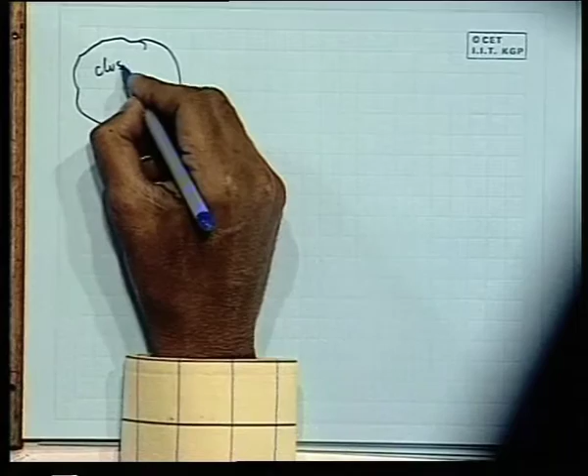and if it goes from state 1, equilibrium state, to another equilibrium state 2, state 1 to state 2, during which it interacts with the surrounding in the form of heat received.

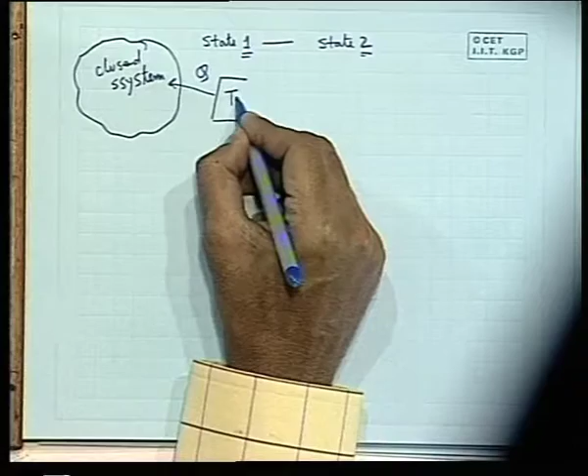Let us consider the heat is received from a thermal reservoir at temperature Th, whereas the environment temperature is T0, which is a fixed undisturbed surrounding. This environment word is used in thermodynamics, distinguishing it from surrounding.

Surrounding is that part of the environment with which a system interacts. This means that in case of two interacting systems, one is the surrounding of the other, but environment is the rest part of the surrounding which is undisturbed in the process. You understand? So that is the environment which is at a temperature T0, based on which we calculate the exergy or availability.

And let us consider the system develops some work W, which we already considered in the last class. And if it goes from state 1 to state 2, and if we designate all the properties like pressure, volume, then internal energy U1 - we consider E if it contains some movable particles, that means kinetic energy, also potential energy with respect to a reference datum.

So we consider as a whole the internal energy, not only the intermolecular energy, then T1, S1, and correspondingly state 2 is V2, E2, T2, S2 and so on - all the properties at state 1 and state 2.

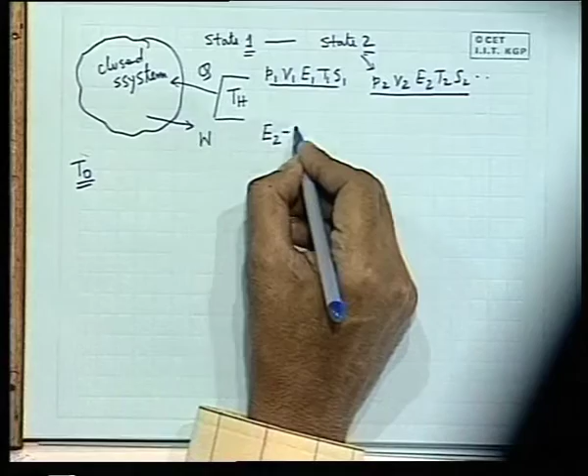Again recapitulating the fact that conservation of energy tells that the change in energy stored within the system, that internal energy, is equal to the total energy received by the system.

Here we do not care where the Q is coming from, from which temperature - we are only concerned with the amount of Q which is coming. So this is purely the energy balance, our classical statement of conservation of energy, or the first law.

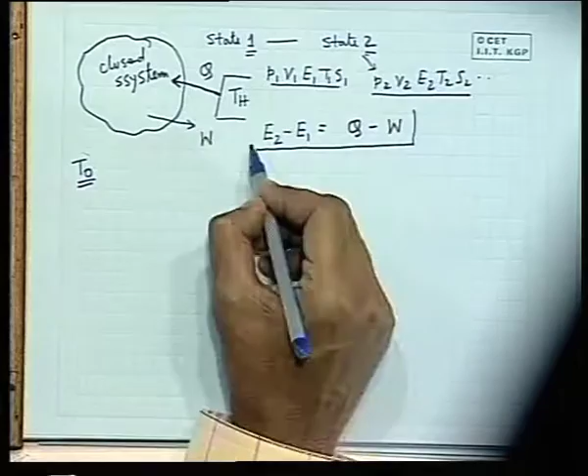That means the change in internal energy equals the net amount of energy received by the system in form of heat and work. That means the final energy, E2 of this system, will be denoted accordingly. It will increase or decrease depending upon whether there is a net energy inflow or outflow from the system.

All right, but now mass is constant - that is the definition of the closed system. Now, what about the availability?

If you do the same availability balance, we know that A2 is the availability of the system at state 2. If availability could have been conserved, neither destroyed nor created, the way energy quantities do, we could have written that the change in availability equals the availability added to the system - that means the availability associated with this heat from a thermal reservoir TH with respect to an exergy environment temperature or reference environment temperature, Q times 1 minus T0 by TH.

This means the availability which has come into the system with Q, minus the availability which has gone out, minus W minus P0 into V2 minus V1, the work lost in compressing the surrounding — this is the net availability coming out, and this is the net availability coming in. So this could have been like this, but we have seen that this change is not equal to this.

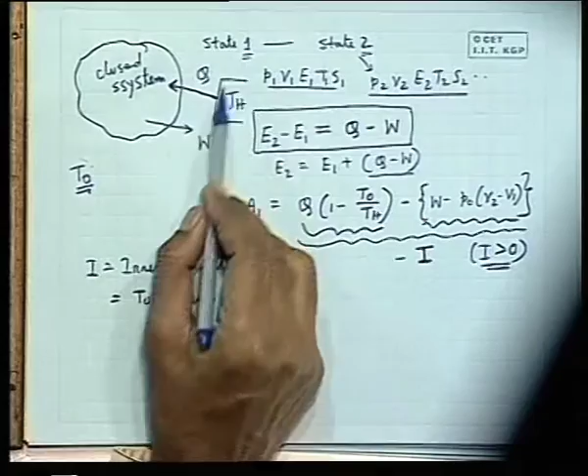Rather, this is minus I, where I is greater than 0, which is the irreversibility. I is called irreversibility, and is defined as T0 into delta S universe, or T0 into sigma entropy generation. This is the delta S, the entropy change of the universe, or entropy generation in this process, by which the system goes from state 1 to state 2 by interacting with the surrounding in the form of heat and work.

So therefore, we see the change in availability is not equal to the net availability transfer. That means the availability A2 should be A1 plus — let us consider this quantity as AT, availability transferred in this entire process — plus AT minus I.

So this is the basic equation for availability transfer. Here one thing you have to understand: just like entropy, we always see that entropy of the universe increases, but not that entropy of a system will increase — it may decrease depending upon the condition.

Similarly, the total availability is reduced or destructed, but the system availability may increase or may decrease. Now here, A2 may decrease or A2 may increase depending upon the relative magnitude of AT and I, where AT is the total availability transfer.

Now, in case when the availability transfer is positive, this quantity is positive and it is more than the availability destroyed, then obviously A2 will increase. A2 may increase or decrease depending upon the relative magnitude of this quantity.

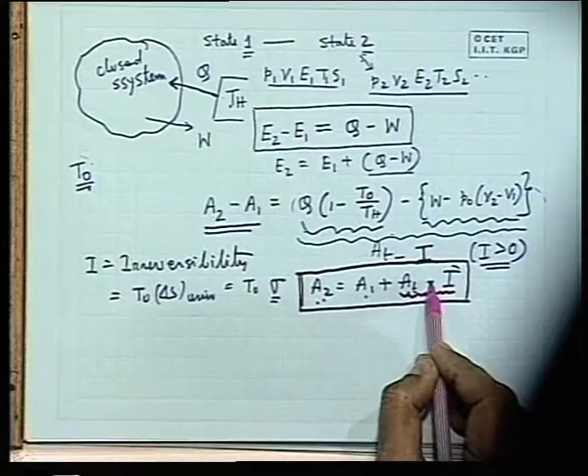When there is a net inflow of availability to the system, transferred in, then definitely A2 will increase, provided the destruction is less, but its increase will not be equal to A1 plus AT, but A1 plus AT minus some quantity — that means the availability is destroyed in the process.

Whether the system gains in availability or reduces or decreases in availability, this change in availability will not be equal to the total availability transferred, but with a quantity minus I, which is the availability destroyed.

This we discussed in the last class. How did we prove it? We first proved what is the availability function.

At any state, this availability function, or availability, is defined as E plus P0V minus T0S, where S, V, E are properties of the system — that is, internal energy, volume and entropy — and P0, T0 are the temperature of the surrounding. This T0, and also P0, is the pressure of the surrounding.

In case of a stationary system, this E quantity will be substituted by U, that is internal energy. Stationary system means where we consider the kinetic energy to be 0, and also if you consider the changes in potential energy to be negligible, then E can be replaced by U. So this is known as the availability function, or simply availability, referred to a single state.

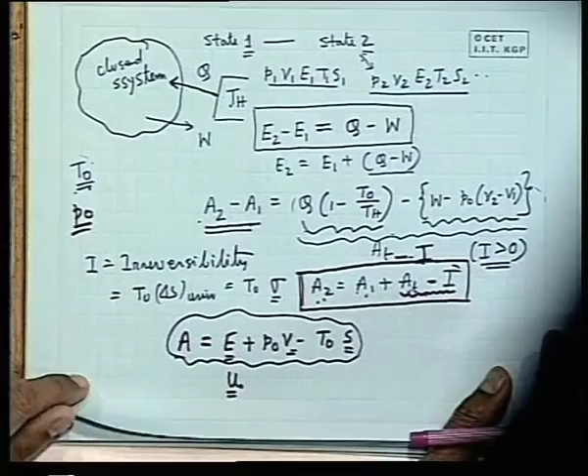First we proved this from the concept of availability by its definition, then we proved that availability is destroyed in a closed system. Now the same thing we will discuss for an open system, but before that, as you have pointed out rightly, side by side we should write the equation for entropy.

Now you see, this is the equation for energy balance, this is the equation for availability balance, including this I — this is the availability balance, where AT is this minus this, the net availability transferred in. So why not side by side we write the entropy equation.

So that is why this question, which one of you asked me — sir, entropy flow and all these things — will be sorted out. Now in the entropy equation, we can write S2 minus S1, that is the change of entropy, plus this minus — rather, this will be minus Q by TH.

Delta S universe is equal to what? Or whatever you can write, sigma or sigma. So this you see is the change of entropy of the system. This you can...

considered as, in this side, Q by Th plus sigma. So you see that the change of entropy of this system does not equal Q by Th. This Q by Th is actually, if you follow classical reversible thermodynamics terminology, delta S system plus delta S surrounding that I told earlier, is delta S universe, which is nothing but the entropy generation. So this is delta S surrounding.

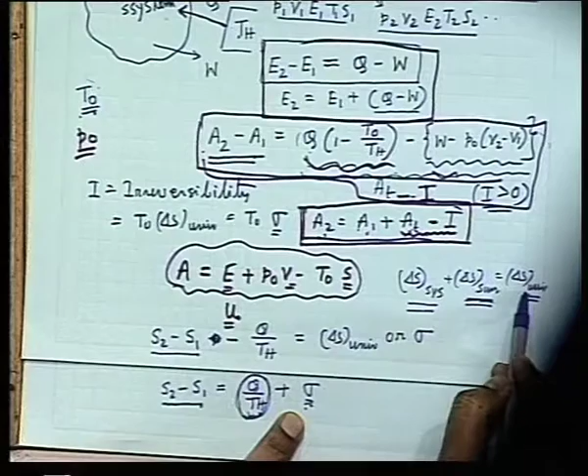You see that the increase in entropy of the system is more than the entropy which is received, if you consider this in terms of the entropy received plus the entropy production or entropy generation, which is nothing but delta S universe. Earlier also I have shown these three equations simultaneously, the same form, where we can recognize one is delta S system, another is delta S surrounding or entropy flow to the system, that becomes equal to sigma, which is equal to the total change in the entropy of the universe, or the entropy generation.

This is the closed system entropy balance. For an open system, things will change a little because of the mass flux across the system boundary. I think this is clear.

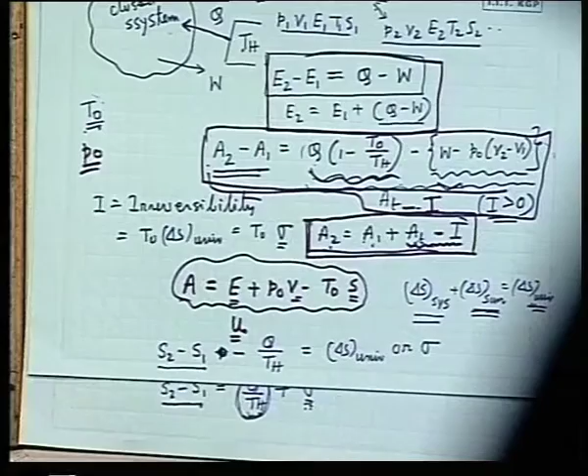The energy balance, the availability balance, and vis-a-vis the entropy balance of a closed system are given by this equation, this equation, this equation. And you see, whereas the energy quantity remains constant, the availability and the entropy quantity are not constant. Availability is reduced and entropy is increased, okay?

Now you come to the same thing for an open system. Let us consider an open system or a control volume. Open system or a control volume. Let us consider an inflow, one single stream of inflow and outflow.

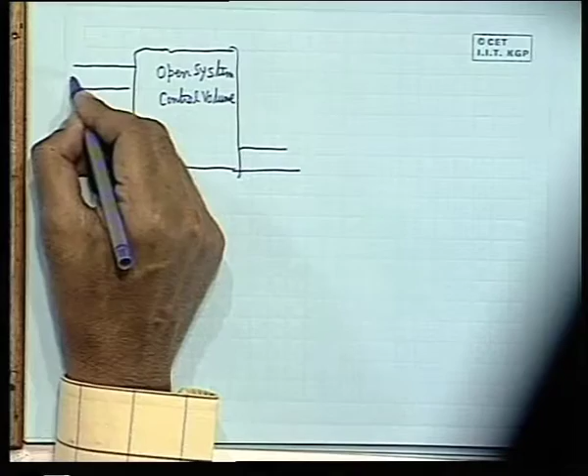So this is, let us consider this as inflow, and let us consider this as outflow. Now, the only difference is that there is a continuous inflow and continuous outflow, and since an open system always operates in this way, there is a continuous inflow and continuous outflow.

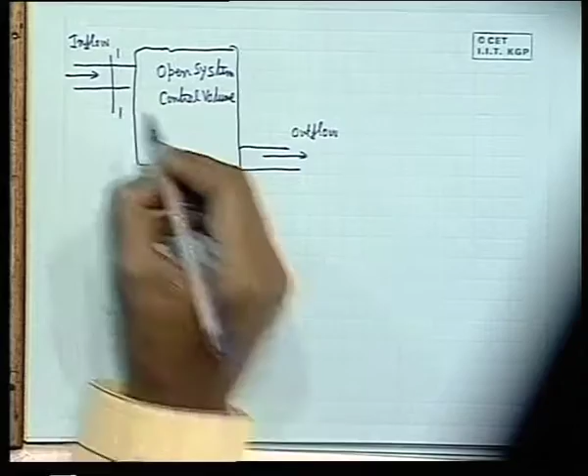So that is why an open system is a continuous system. So things are always analyzed in terms of the rate process. Therefore, I first designate section 1 and section 2, the way I designated state 1, state 2 for a closed system, for the open system 1, 2, and I designate everything in terms of the rate, that means dot. Dot means the derivative with respect to time. M1 dot is the rate at which mass enters the open system.

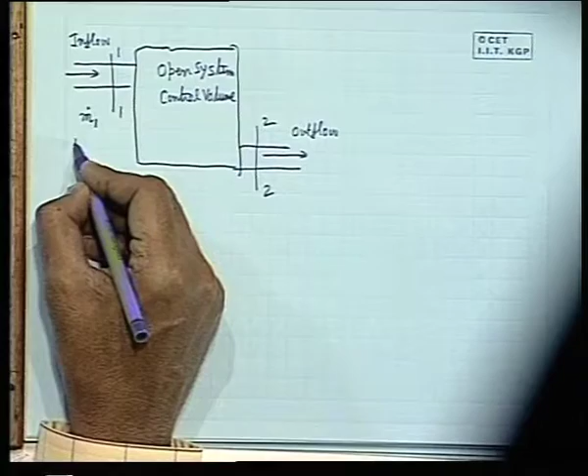Similarly, here the specific values of these properties are required: internal energy, as you have already seen earlier, plus P1 V1 plus V1 square by 2 plus GZ1. What is GZ1? Z1 is the elevation compared to, or measured from, any reference datum. Then this quantity represents the specific energy, total energy per unit mass associated with the flowing stream. It is a repetition that this is the internal energy, this is the flow work, this is the kinetic energy, this is the potential energy.

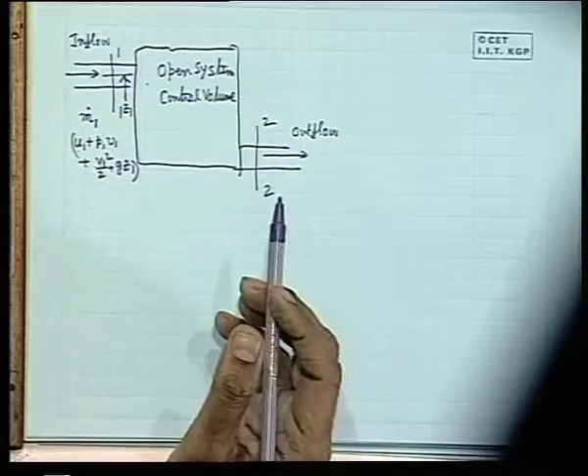That means when this flux is introduced into the open system, along with this flux, this amount of specific energy, that is flow energy, sometimes we call it flow energy, is being introduced into the open system. Similar is the case here. If we write that m2 dot is the mass flow rate, then we can write similarly this quantity: u2 plus p2 v2 plus v2 square by 2 plus gz2.

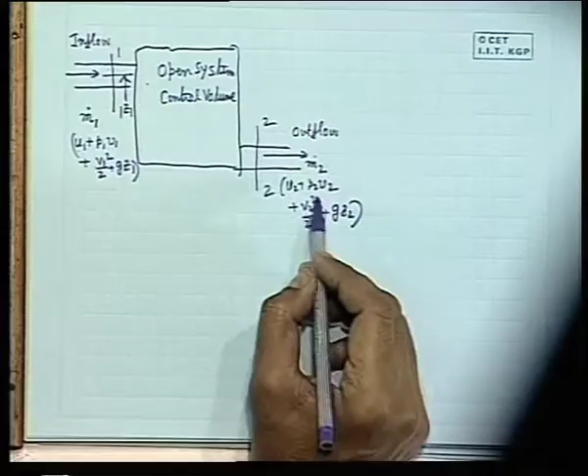Can you see that, p2 v2? Okay, very good. I will write it in a little bigger font. This is the specific energy coming in.

So first is the mass balance. To do that, we consider in general that mCV is the control volume mass and ECV is the control volume energy, recapitulation of the earlier thing. So mass balance, the conservation of mass in an open system: the way energy is conserved, mass is neither created nor destroyed. So m1 dot minus m2 dot equals dmCV/dt, that is the change of mass. That is the first mass conservation.

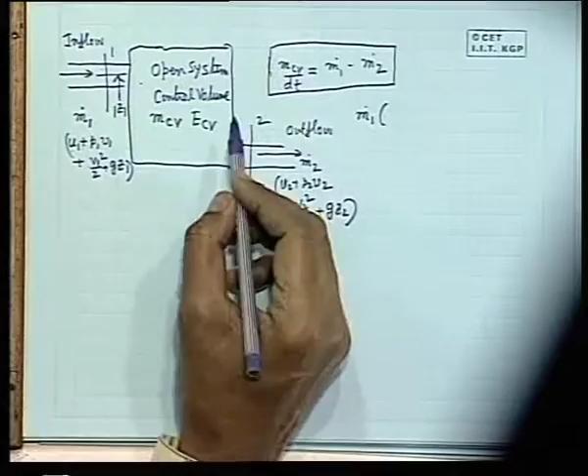Then what is energy conservation? If we write here, we can write m1 dot into that, that is the energy. Apart from that, we can consider the open system also interacts energy in the form of heat and work.

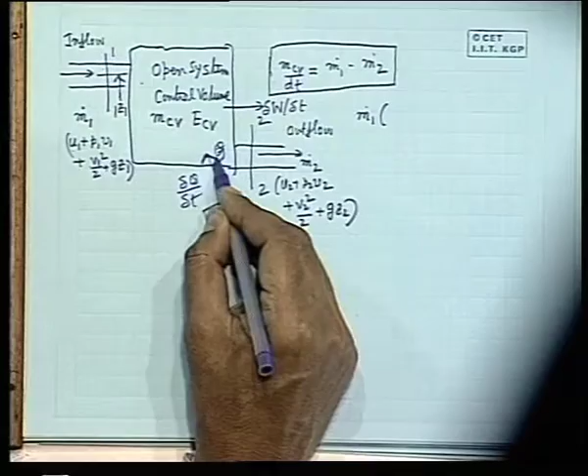Let some heat be coming to the open system, Q, from a reservoir TH, and let this system develop some work W. Here also we consider in terms of the rate, del Q del T, not Q, and we consider del W del T. This means this is the rate at which heat is being added, and this is the rate at which work is being extracted from an open system, which is usually the shaft work.

Now we make an energy balance. We can write that the change in energy, dECV/dt of the control volume, is nothing but the net energy coming into the control volume. Energy is coming in two ways: one due to mass, and another due to heat and work interaction.

So what is the net coming in? One is m1 dot times u1 plus p1v1 plus V1 squared by 2 plus gz1, plus del Q del T, it is coming in. And what is going out is minus m2 dot, u2 plus p2v2 plus V2 squared by 2 plus gz2, minus del W del T. So this is as simple as that.

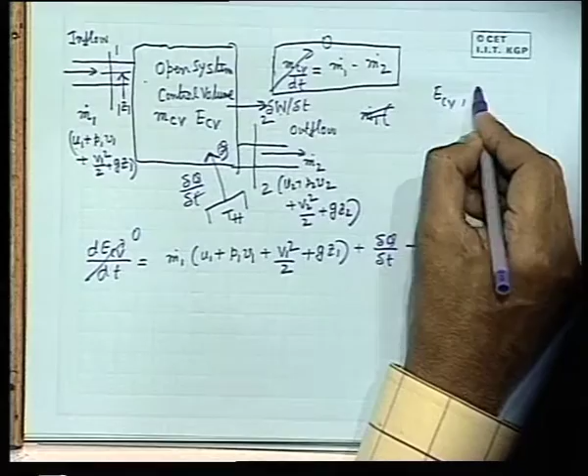Now in case of steady state, we consider this is 0 and this is 0, which is most important. In a control volume or open system, the influx and efflux may not be the same, both in terms of mass and energy, so the property within this open system may change. But in a steady state operation, the state variables at inflow and outflow may change because of these W and Q interactions, but the total energy coming in and total energy going out, along with delta W and del Q, make the thing steady, meaning the properties within the system do not change with time, which means both ECV and mCV remain invariant with time.

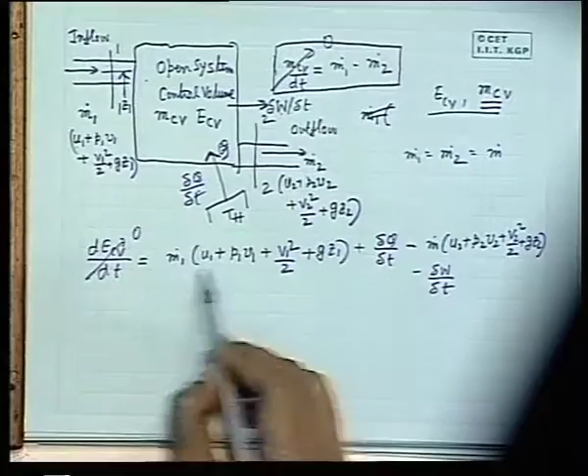So in that case what happens? m1 dot is equal to m2 dot, meaning the mass flow rate at inlet and outlet are the same. Let this be m dot. So if this is 0 and m1 dot equals m2 dot, then conventionally we write this equation under steady flow condition in terms of the mass balance -- you understand, not mass balance, in terms of per unit mass.

That means we can write U1 plus P1V1 plus V1 squared by 2 plus gz1, minus U2 plus P2V2 plus V2 squared by 2 plus gz2. We can take this side: del W del T minus... this gives a clear picture that there is a balance between the energy transfer because of mass flow and because of heat-work interaction. So this we studied earlier. This is for the steady state. Any problem? Is this clear?

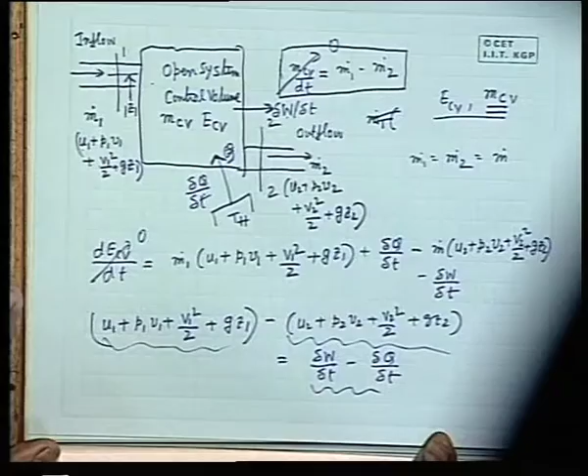Del m, sorry, per unit mass, del m. Clear? Because this is the recapitulation of the earlier thing.

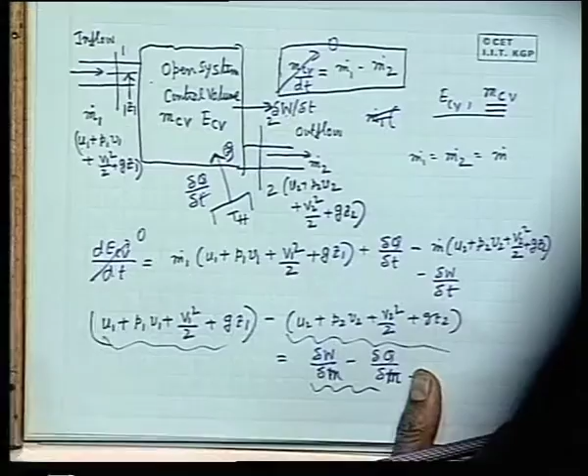Now consider if along with this we go for an availability balance, what will be the picture. Okay, let us draw the same diagram again for our same diagram. Let this be the control volume.

Here we will consider only the availability. In a similar way, m1 dot, m2 dot, from section 1 to section 2.

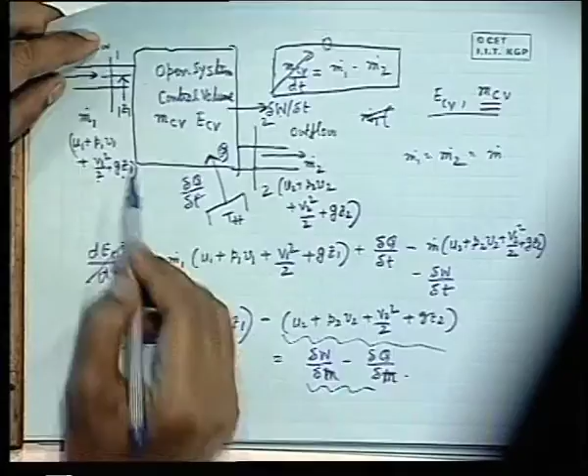Now, we know that with m1 dot there is an energy coming in, that is m1 into u1 plus p1 v1 plus v1 square by 2 plus gz1. So, with m1 mass flux there is an energy flux.

Similarly, with m2 mass flux there is an energy flux. In a similar way, if we consider there is an availability flux coming into the control volume because of this flowing stream of fluid of the working system, there is an availability whose specific value we denote as AF1. This is because of the flow, and is known as flow availability. Let us define the flow availability at the other section as AF2.

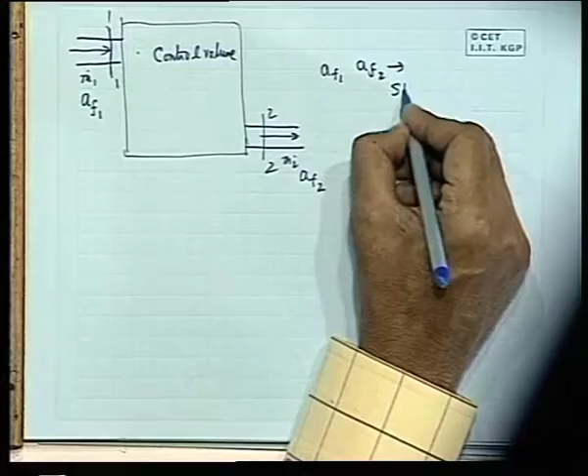Because the space is very small, otherwise I could have shown everything in comparison, energy flux versus availability flux, that could have been even better. That means, in case of energy, there was a specific energy associated with the flow, that is H, H1 depending upon the state, that is U1 plus P1V1, plus V1 square by 2 plus gz1.

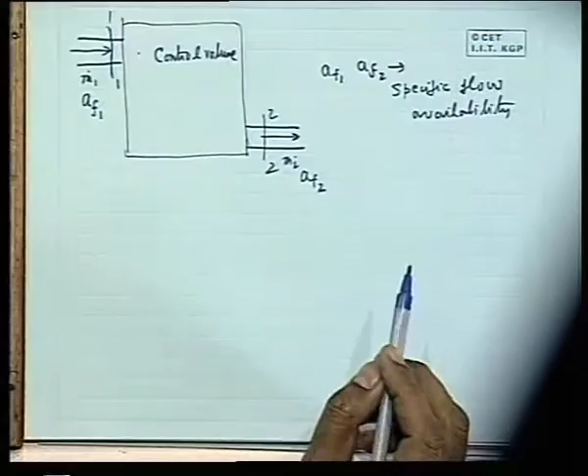Similarly, if we consider there is a specific flow availability, the availability per unit mass along with the flowing stream, then in the similar way as we did for energy, at a certain rate the availability is coming into the control volume, and at a certain rate availability is going out of the control volume.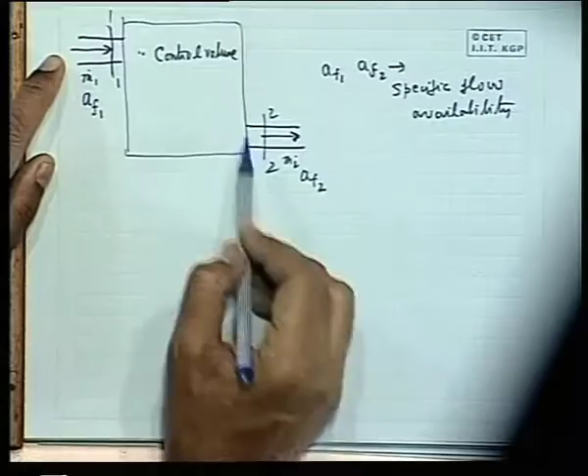This is the most important concept: the difference with respect to a closed system is that mass flux exists across this boundary. When mass comes in, along with it, it brings energy to the control volume, whose value is m1 dot into the specific flow energy, which is the sum of enthalpy plus kinetic and potential energy. Similarly, it brings into the control volume some availability.

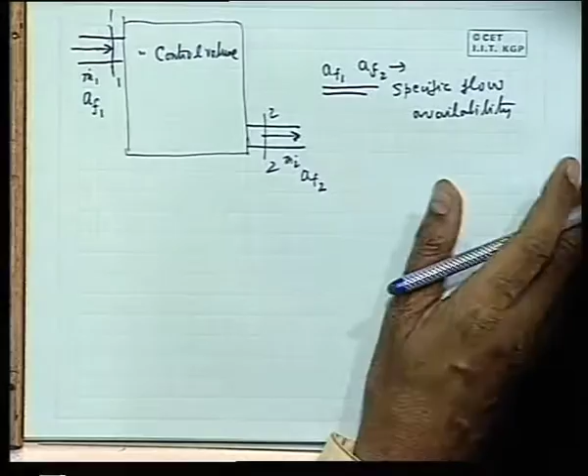To account for that, we define availability per unit mass with the flow stream at inlet and outlet, defined as specific flow availability. For now, we take this for our understanding, then later I will find its expression.

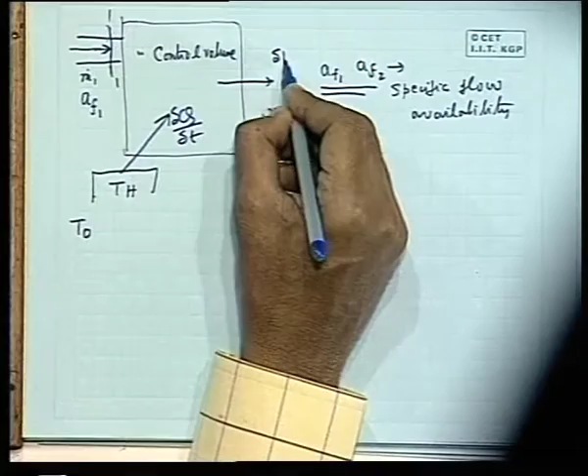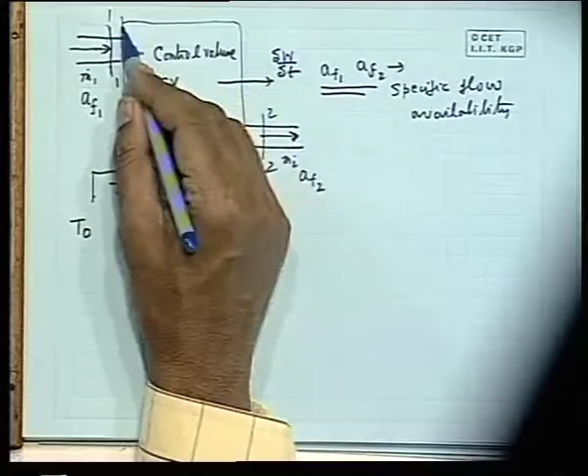In a similar way, if we consider that Q is given here from a temperature reservoir TH, whereas the environment is at T0, we consider del Q del T and del W del T, the rate at which work is coming out. Similar to the case of energy and mass, if ACV is the total availability within the control volume at any instant, then by the method of induction we can appreciate that dACV/dt is never equal to the total availability balance.

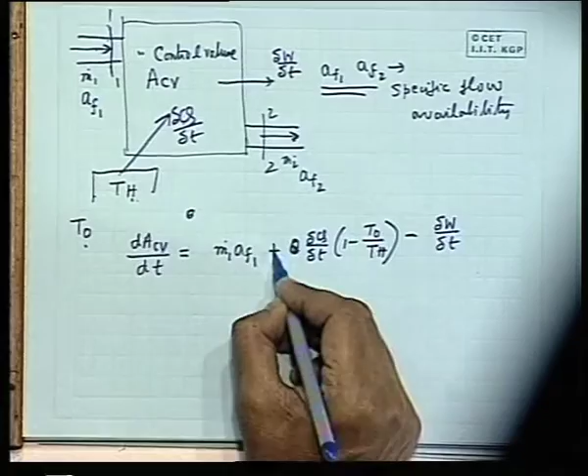So this part will be there. In case of energy, it was only del Q by T minus del W del T, because it is shaft work, no displacement work, since the control volume is fixed in its volume in space. So minus delta, this is the net energy transferred. So this is the net availability transferred to the control volume.

If we do that by the process of induction, as we have done so far, we find this equality will not hold good; something will be destroyed. That means the change in availability with time will not equal the net rate of availability coming into the control volume. There will always be a term I, the irreversibility, which equals T0 into delta S universe, or T0 sigma of the system.

I dot is T0 into delta S dot, the rate at which entropy is being generated, or the rate of change of entropy of the universe. Thank you very much, it is I dot, very good.

By our common sense and method of induction we can tell that in a steady state this will be 0, and accordingly this minus this I dot, the net rate of availability influx minus I dot, equals 0. This is the precise concept parallel to the closed system's availability balance, but now for a control volume.

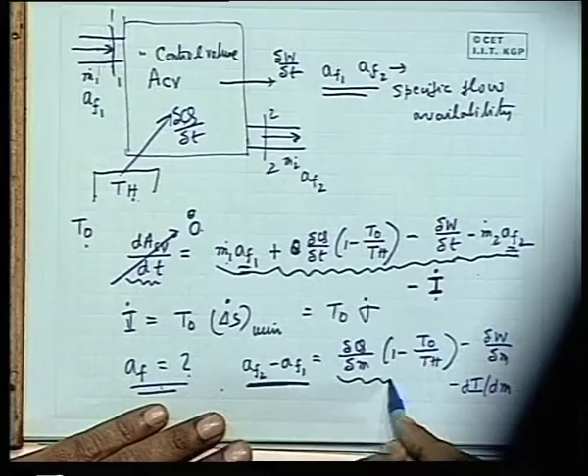So in a steady state, one can write this equation as AF2 minus AF1 equals del Q del M. into 1 minus T0 by TH minus del W del M minus I dot, that is dI dm. So in steady state it is again clear that this change in flow availability is not just the net availability transferred into the system, but minus some quantity which is the irreversibility per unit mass, similar to what we saw for a closed system.

This equation is all right, now we need to understand what is this flow availability. We wrote it following the sequence from the closed system analysis. So then we have to find the expression for flow availability, the concept of which we've taken as: imagine a control volume with an inflow.

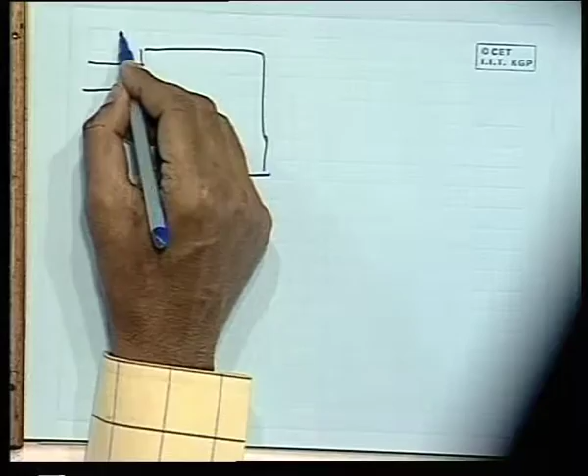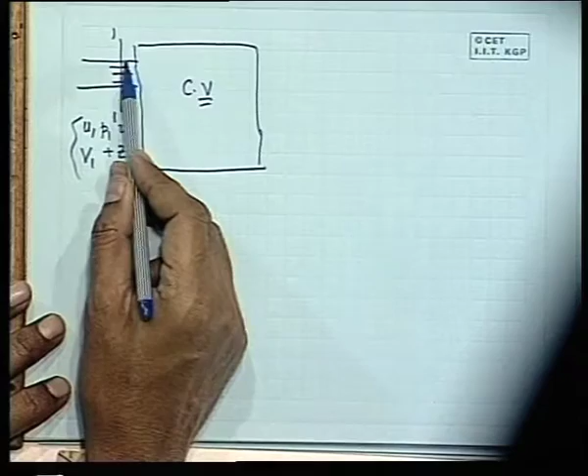The flow availability is defined this way: if there is a stream of fluid coming into a control volume whose states are specified, for example U1, P1, V1 the velocity, Z1 from some datum the potential energy per unit mass, whose specific values are fixed, then the flow availability of this mass of fluid flowing in is defined as the maximum work that can be extracted from this stream by an operation through a control volume or open system.

By which this stream comes into equilibrium with the fixed environment, similar to how we defined availability for a closed system: the closed system is at a state different from the fixed environment, so there exists an opportunity to develop work, and the maximum work obtainable is only possible in a reversible process when the system reaches the dead state.

Here also, when the flow of fluid stream comes to a dead state, what is that dead state? It's when its properties equal the ambient properties and there is no kinetic energy. Because if a system is at the same pressure and temperature as the surroundings but has velocity, since the surroundings is a fixed reference environment at rest, its velocity must also be 0. Similarly, considering gravitational potential energy, this state must coincide with the reference datum of gravitational potential energy from which it is measured, not the absolute scale at the center of the earth, but somewhere from where we measure the gravitational potential energy.

But fortunately, in the analysis of thermodynamic systems or processes, the change in gravitational energies, for all practical cases, is quite negligible as compared to the changes of other quantities. So we are not much bothered about the gravitational potential energy and where is the datum and all these things. But kinetic energy has to be 0, otherwise a flowing stream cannot come to a dead state. Dead state means if this has got a velocity, we can develop more work by reducing that velocity. So a dead state has to be considered.

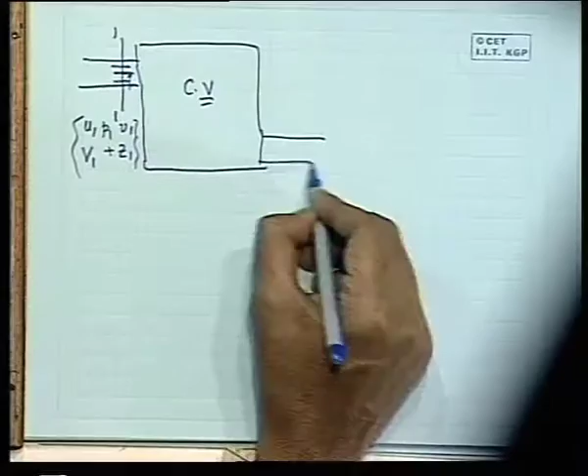Be careful, where I give you the same thing, 0 0, not 2 2, 0 0 as the outlet stream sections, where all these conditions will be denoted as u0, p0, v0, and sorry, v0 has to be 0. Let us consider z0, from where we have measured z1. So z0 is equal to 0, because from z0 we have measured this z1. That means as if the potential energy, kinetic energy, has become 0 and the fluid stream state has become that of the surrounding. This is the easiest way. You go through books, there are different ways different books follow to find the expression of flow availability. I think this is the easiest way to prove it.

Let us consider the environment temperature T0. Now the similar way we thought in the case of a closed system, from the same environment temperature T0 some amount of heat is being added.

Now let us consider a steady state system, where m dot is the flow coming through the system. We consider del Q del M is the heat added, and at the same time we consider del W del M is the work done. So, whatever may be the case, we can write from our energy balance, which we did earlier on the mass basis, that U1 plus P1V1 plus V1 square by 2 plus GZ1

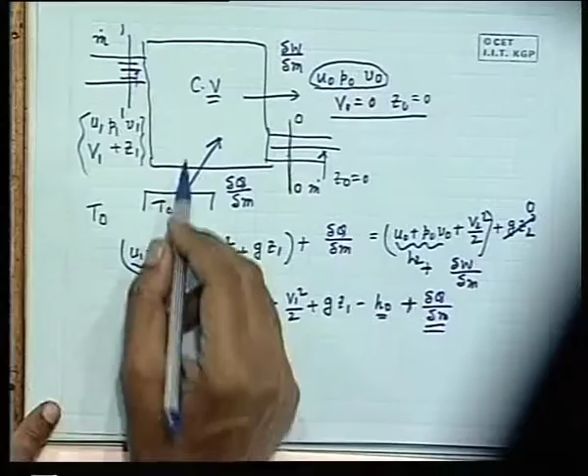Now, similar to what we did earlier, we take the entropy balance here, which is very important: S2 minus S1. What is S2, what is S1? Please tell me, which is very important. That is why at the beginning you asked me, sir, about entropy flow in a closed or open system. S2 minus S1, small s rather, is the specific entropy change of this flowing stream. So I will not write S2, rather I will write S0 minus S1.

So that is the entropy increase, and the system surrounding rejects it, minus 1 by T0 del Q del M. So this is the entropy change of the universe, or delta S universe, which has to be greater than or equal to 0. I keep the equality sign because for a reversible process, which covers all the processes.

Here you see the control volume is at steady state. Things are not being complicated by considering the control volume at unsteady state. That means the change of entropy of this fluid flowing through it, or the working system flowing through it, per unit mass, minus the change of entropy of the surroundings per unit mass of the system. That means we are considering everything per unit mass of the working system through this control volume.

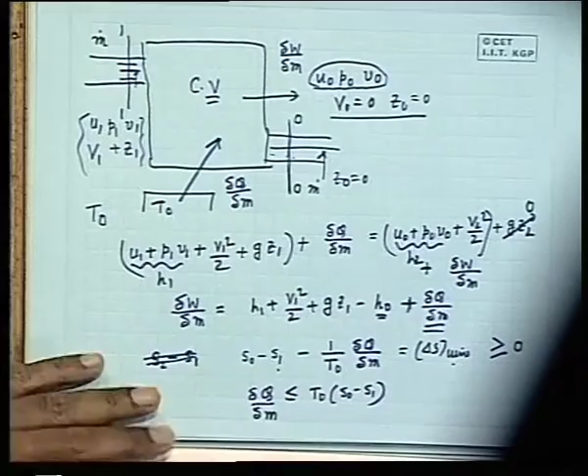This is greater than 0. So from this one can conclude delta Q is less than or equal to T0 times S0 minus S1, so delta Q by delta M. So I will now substitute this value of delta Q by delta M here, and what will I get? You will get the same thing as we did earlier, that del W del M will be less than or equal to...

Now, if I substitute this and do this little algebraic rearrangement: minus T0 S1, minus H0 minus T0 S0 plus V1 square by 2 plus GZ1. So, what am I doing? I am just substituting these inequality relationships here for del Q del M.

So I get an inequality relationship. That means now it is clear that the maximum del W del M which we can get is the maximum work which pertains to the reversible process, and therefore equality signs will be there. Obviously mathematically this is the maximum value, because it is less than or equal to, and physically it corresponds to that.

So again, repeating this thing: V1 square by 2 plus GZ1. So therefore, this is the expression, and by definition this is the flow availability. Now, if I define this as a function psi, such that psi is equal to H minus T0 S, where H is the specific enthalpy, S is the specific entropy of a system in a control volume at any section, that means at inlet or outlet,

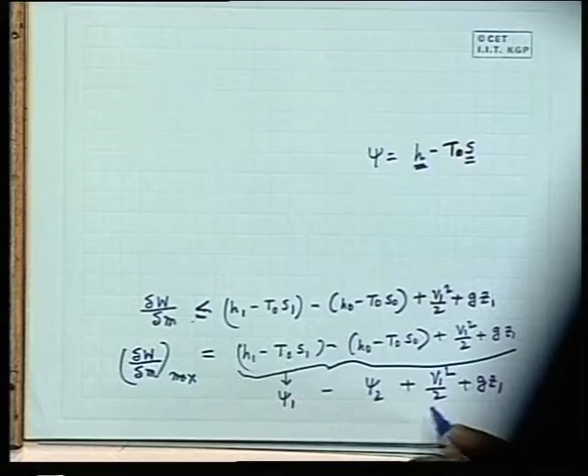then we can tell that it is psi 1 minus psi 2 plus kinetic and potential energy terms. But if you are not bothered about the changes in kinetic and potential energy, you can neglect it, and simply we can tell psi 1 minus psi 0 is the flow availability at the inlet section 1, or any section. The outlet flow availability will be psi 2 minus psi 0, if outlet section 2 is not coinciding with the surrounding environment state 0.

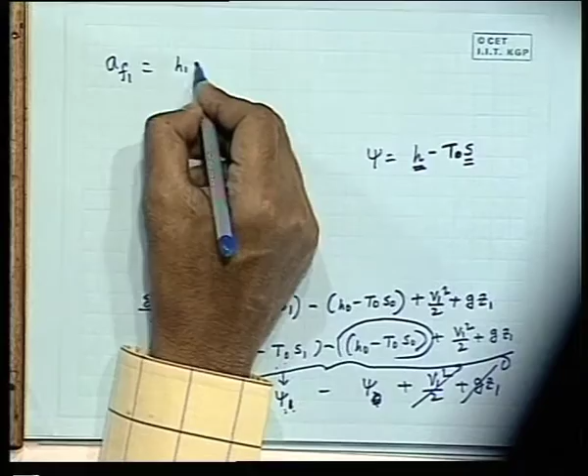So this is clear. Since this part is constant, we simply tell that AF1 is equal to H1 minus T0 S1 plus V1 square by 2 plus GZ1. That means at any state, by denoting H and S as the state variable, whether it is 1 or 2, I can write this.

That means if this H and S is different from H0, S0, and if V and Z exist, then there is a flow availability with respect to the reference datum, where the enthalpy is H0, S0, P0, T0. That means, with respect to a reference environment, the availability of a flowing stream is defined by specific flow availability as specific enthalpy minus T0 into specific entropy, plus kinetic energy per unit mass and potential energy.

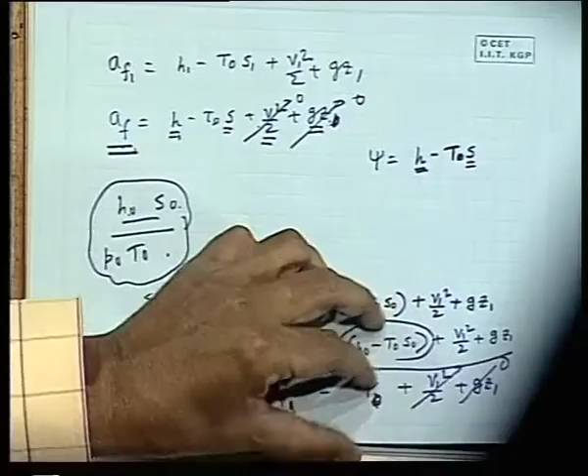This part you can neglect if you neglect the changes in kinetic or potential energy. So therefore, now we come to the definition of flow availability, which is very important: specific flow availability. In solving problems this will be very important. Specific flow availability AF is H minus T0 S plus V square by 2 plus GZ. So this is the definition of specific flow availability.

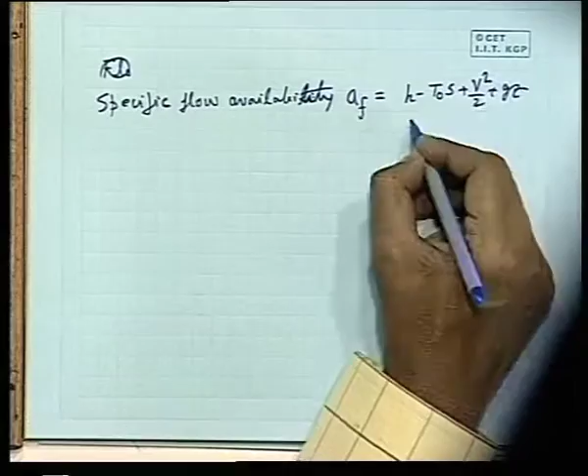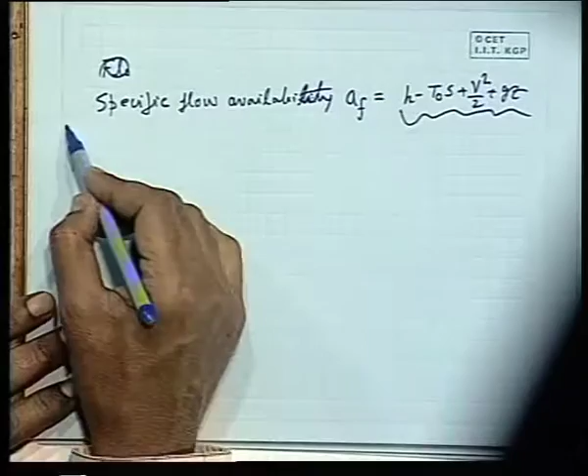So if you go back to our control volume analysis, we will see that if we substitute these flow availabilities like this, then you will get the same relationship. Delta S universe is the same. So therefore, now I write all these three equations applied to a control volume, then it will be clear. I am not writing the diagram again.

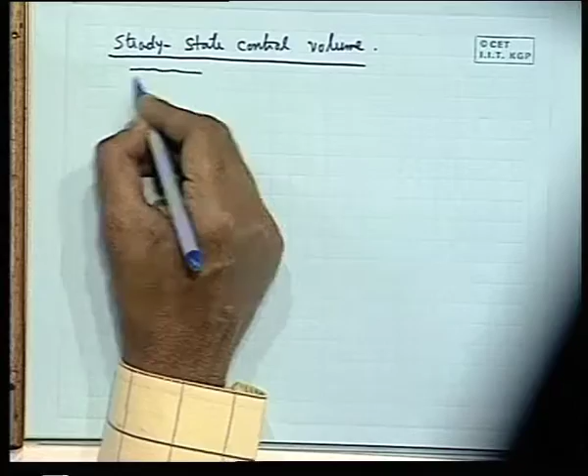Let us consider a steady state control volume, a steady state control volume. Let me draw the diagram, otherwise steady state control volume, I am not giving any.

So this is inflow section 1, and this is outflow, steady state. This is the control volume which gives shaft work. So when it is steady state, I write in terms of per unit mass, del W del M as it is coming, and let heat be added from a reservoir at TH.

Now you ask any questions if you have any doubt. Mass balance: M1 dot is equal to M2 dot, and because of this mass balance at exit and inlet, we are writing everything per unit mass. So therefore, the mass balance equation does not have to be written explicitly, it is implicit, otherwise we cannot write the energy balance or balance of exergy and other quantities in terms of mass. So though I have written the mass balance equation, it is automatically implicit.

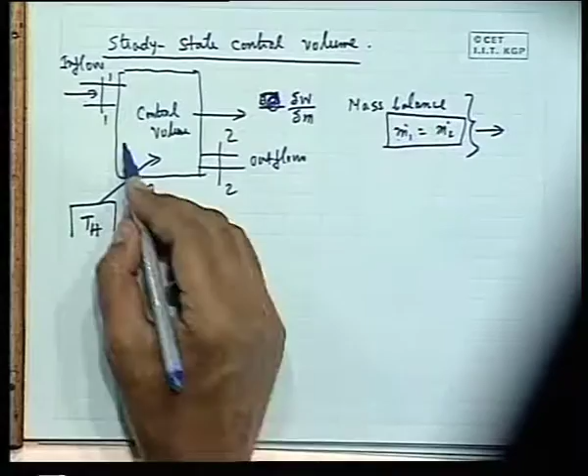Now I write in terms of this energy balance. So what is this energy balance? Energy balance is this inflow energy, U1 plus P1 — this you cannot see, energy, here I write energy. What is energy?

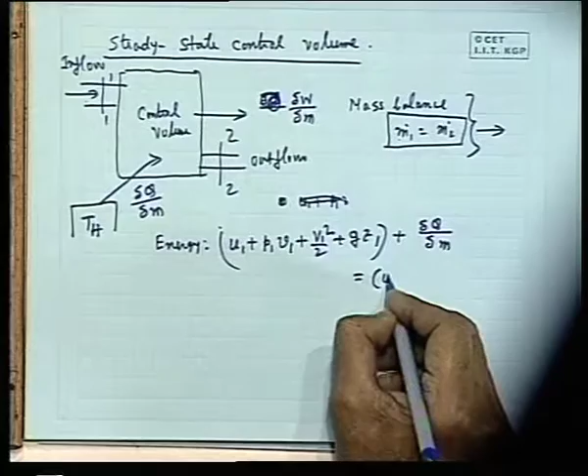You have to write it specifically: P1 V1 plus V1 square by 2 plus GZ1, that is the inflow energy, plus del Q del M, equal to P2 V2 plus V2 square by 2 plus GZ2 plus del W del M. So, this is the energy balance.

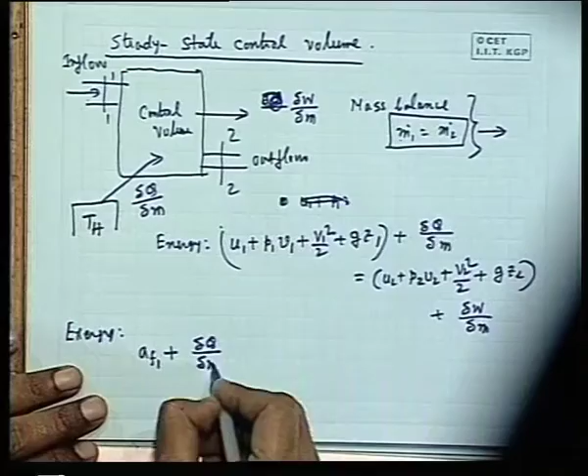What is exergy balance? Please tell me. Exergy balance is similarly AF1 plus del Q del M. AF1 takes care of this thing, this is the specific flow exergy. Similarly, AF1 plus del Q del M.

What is AF1? AF1, with reference environment T0, is H1 minus T0 S1 plus V1 square by 2 plus GZ1. I write in terms of AF1 plus del Q del M into 1 minus T0 by TH equal to AF2. What is AF2? H2 minus T0 S2 plus V2 square by 2 plus GZ2. These quantities together define AF2, plus del W del M minus...

I DIDM, DIDM. What is DIDM? DIDM is T0 into d sigma dm, that is the rate of entropy generation per unit mass.

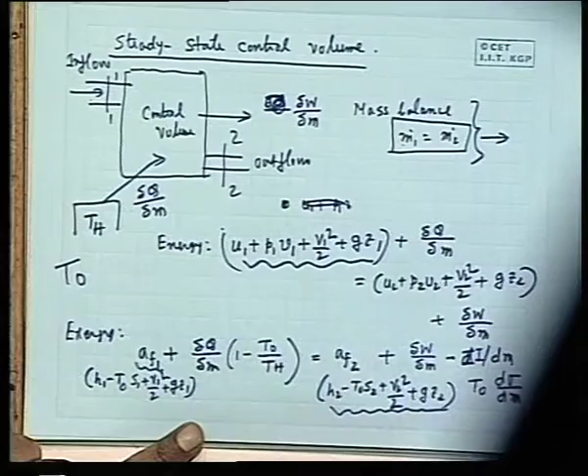Now, what is entropy flow? As you asked at the beginning, let us write the entropy balance equation. What is the entropy balance equation per unit mass basis, if you write entropy coming in as S1? What is the entropy flow because of this?

That is plus del Q by del M into 1 by TH, that is the entropy coming in, equal to entropy going out, minus the entropy generation per unit mass. Rather, S2 will be equal to S1 plus 1 by TH del Q del M plus d sigma dm.

Clear? So this you can consider as the entropy flow from the surrounding. This is the entropy flowing out, this is the entropy flowing in. So, entropy flowing out from the control volume is equal to entropy flowing into the control volume plus the entropy received because of the heat transfer process, plus the d sigma dm. Any question here?

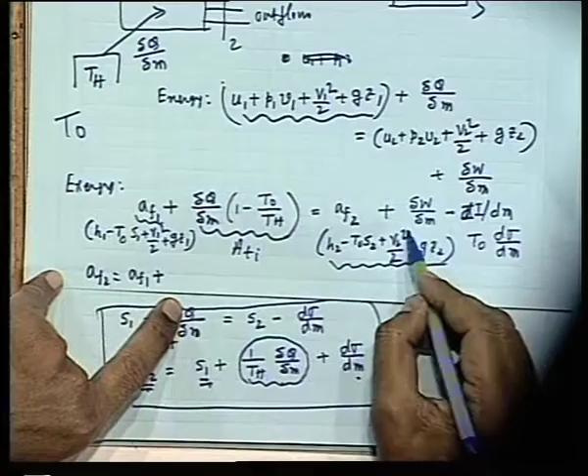So this is the typical entropy balance. You see, the entropy balance and exergy balance or availability balance is the same thing. Here if you write AF2, AF2 is AF1 plus this availability transferred in, let us call this ATI, and availability transfer out is ATO. Then AF1 plus ATI minus ATO, that means net availability transferred in, minus T0...

The equations are almost the same. Because of this, this is there: the outlet availability, specific flow availability, equals the inlet flow availability plus the transfer minus the destruction. Here, the outlet entropy is the inlet entropy, that is, the entropy flow out is entropy flow in plus the entropy transferred in plus the generation of entropy.

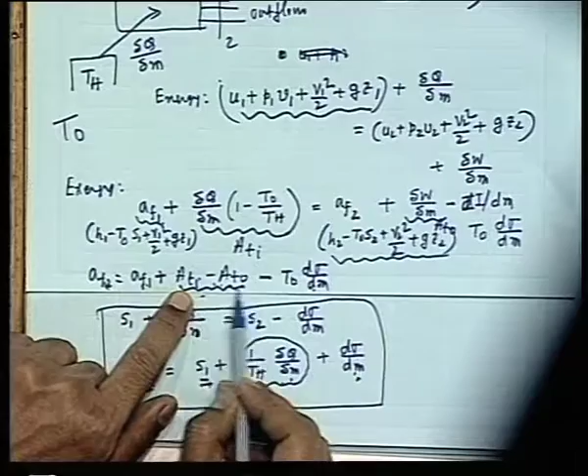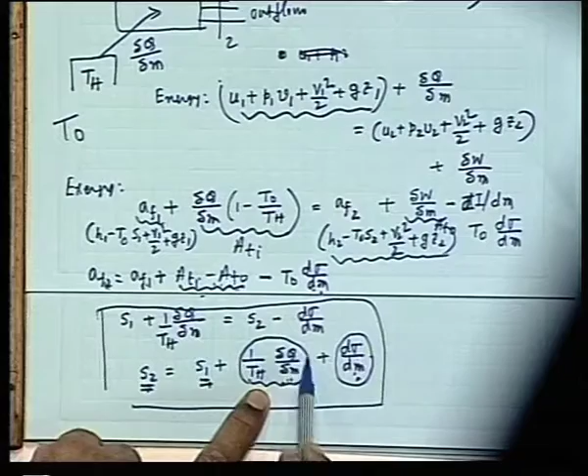So now this availability at the outlet may increase or decrease depending upon the relative values of these two. When there is a net availability transferred in, whereas the destruction is less than that, there will be an increase, but that increase is not in proportion to what has come in. Similarly, the entropy going out may be less or greater than this, depending upon whether this quantity is positive or negative. If positive, it is greater than S1 by another quantity because of generation. If less, it is not less by this amount, which is negative in that case, but by a lesser amount, because some positive quantity is being added, which is the generation of entropy. That is as simple as that.

In irreversible thermodynamics, there are many ways this is defined: entropy transferred in, entropy flow in, entropy flow out. Any way you define it doesn't matter, but if you write the equations correctly following any particular nomenclature, things will be all right.

So this is exactly your availability or exergy balance for an open system, vis-a-vis the exergy and availability balance of a closed system, as we discussed earlier.

Now the most important thing comes: what is meant by second law efficiency. Before that, I like to tell you, if you recapitulate the entire thing, we see that in any natural process, the work potential of a certain quantity of energy, whether it is in the form of transit, that is heat, or it is in the form of stored energy in a system because of its state, or it is in a flowing stream of fluid because of its state...

So, in three cases we have seen the availability of a closed system, the specific flow availability of an open system, and also the availability or exergy of a heat flow. We have seen all these are continuously reduced. This work potential is reduced because of natural processes, the interactions in a natural way with the surroundings. So, this work potential is the availability, known as the quality of energy, which is being continuously reduced.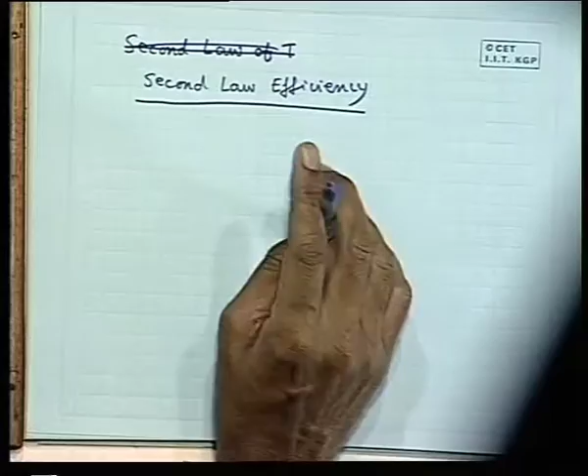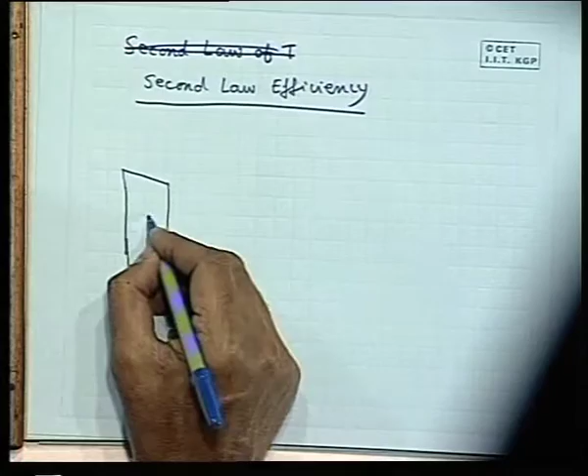Now, to define this second law efficiency, let us first consider the case of a turbine, a work producing unit.

Rather you just leave this, I think this is odd. So, let us consider second law efficiency, second law efficiency. What is the time? Time is up. What is the time? Another 5 minutes, but I do not know whether I will be able to do it.

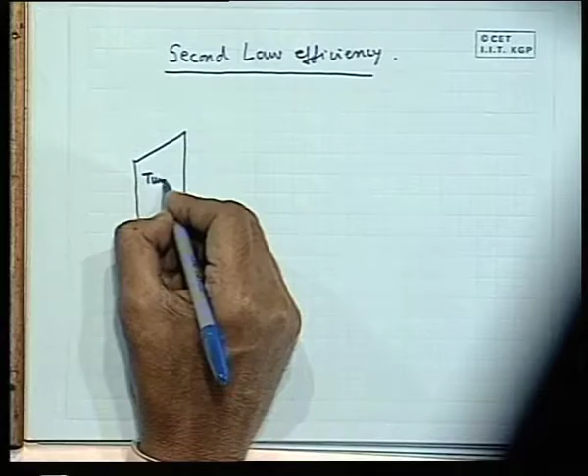Okay, then let us consider the case of a turbine, a work producing device. There is an inflow of gas and an outflow of gas, state 1 and state 2. Let us consider the change of kinetic and potential energy to be 0. So, let H1 and H2 be the specific enthalpies, and let it develop del W by del M amount of work, the shaft work.

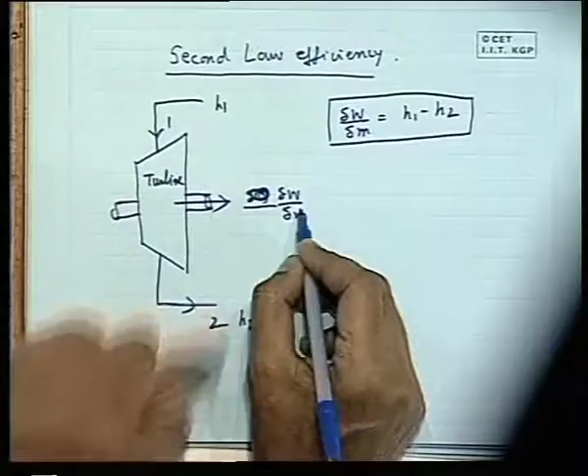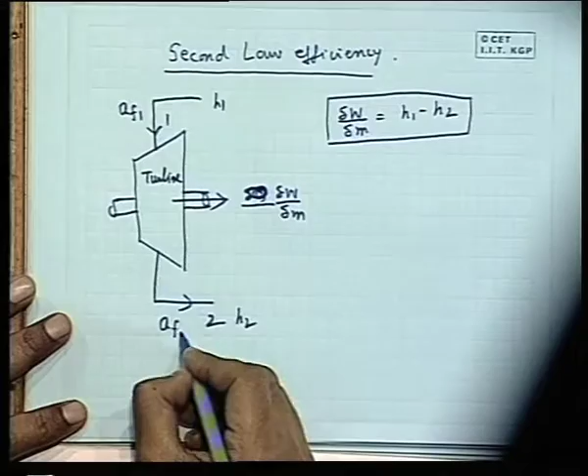Now, we know from the energy balance that del W by del M is H1 minus H2. That means this is the actual work which we obtain. We measure the work, we measure H1, we measure H2, and we get this. Now, if we define the availability at section 1, AF1, and at section 2, AF2, then AF1 minus AF2 is, by definition, H1 minus T0 S1 minus H2 plus T0 S2, neglecting the changes in kinetic and potential energy. This becomes H1 minus H2 minus T0 times S1 minus S2.

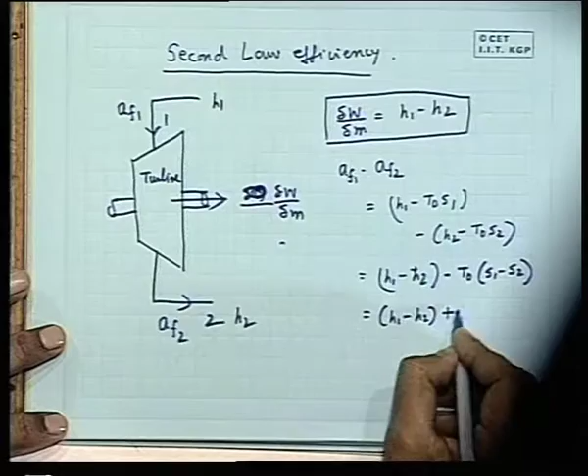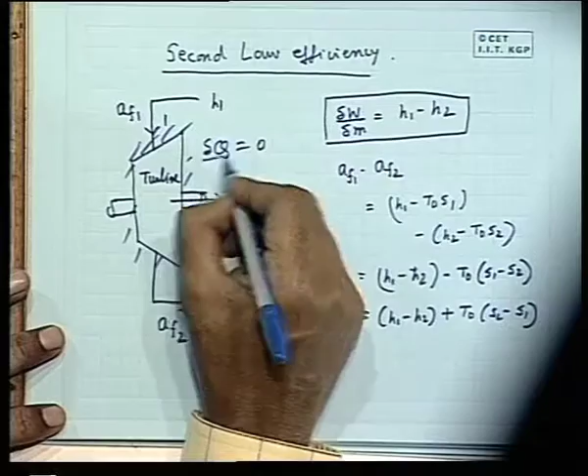Before that, I should have told one thing I forgot: the turbine is adiabatic, that means Q is 0, del Q by del M is 0. That is why I can write this equation from the energy balance. Time is up, that is why I am in a hurry. I will repeat it again in the next class. So, what is this then?

Irreversibility, di/dm. Why? Because this is the entropy generation of the universe, S2 minus S1, the change of entropy of the system, because it is adiabatic, there is no change of entropy of the surroundings. That means del W del M, the actual work obtained, plus the irreversibility is the change in the flow availability. That means, if the process is natural, it is irreversible but adiabatic.

But if it is reversible adiabatic, then this term would have been 0. Then del W del M would have been exactly equal to the change in flow availability, meaning there was no destruction of availability. That decrease in flow availability is what we get in terms of work transfer. Then AF1 minus AF2 could have become del W del M. But in this case, it is not that. In a natural case, AF1 minus AF2 is work done plus the irreversibility.

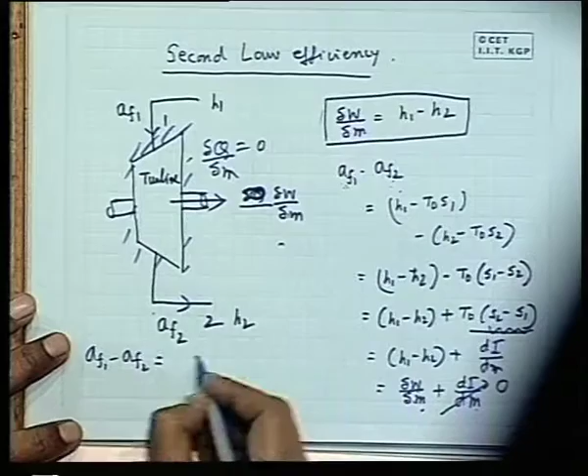That means, this AF1 minus AF2 is described as the ideal work, ideal work, ideal work, which equals the actual work plus the irreversibility. With this, we define the second law efficiency eta 2 as del W del M actual over del W del M ideal. So actual work is less than the ideal work by this quantity, which we can write as 1 minus di dm by del W del M.

This is because the ideal work is the actual work plus di dm. So therefore, actual work is the ideal work minus this irreversibility term. That means the actual work which we get is less than the ideal work by the irreversibility on a per unit mass basis. This is defined as the second law efficiency.

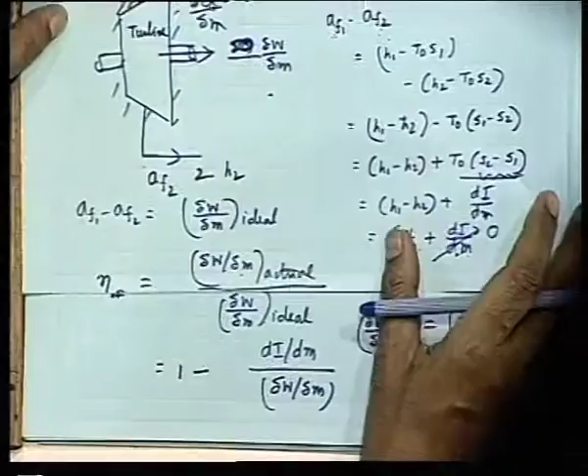So if the process could have been reversible, the decrease in availability could be the work, that is the ideal work. But in this case, the work is H1 minus H2, which is the ideal work minus this irreversibility term. So this is the ideal work, del W del M ideal.

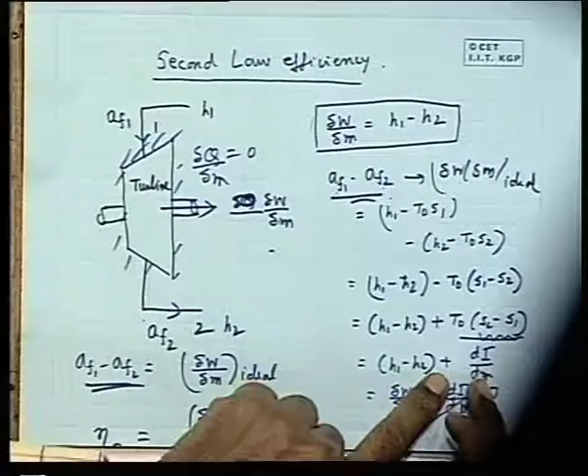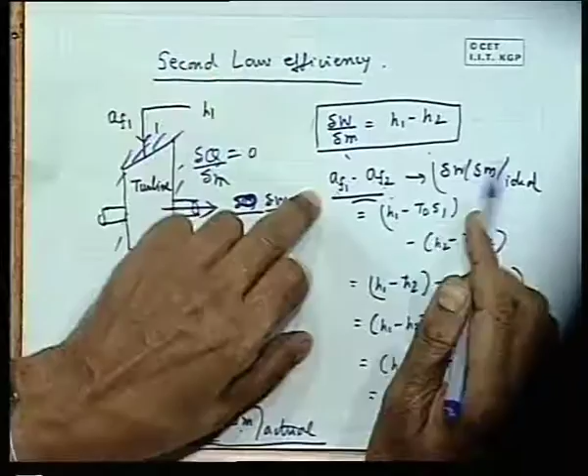So this way we define the second law efficiency, that means the actual work by ideal work. If the process could have been reversible, there could not be any irreversibility, di dm equals 0, and the availability difference is equal to the enthalpy difference. Enthalpy difference is always equal to the work done, regardless of whether the process is reversible or irreversible. In case of reversible processes, the enthalpy difference becomes exactly equal to the availability difference, because they are related by this quantity T0 times S2 minus S1.

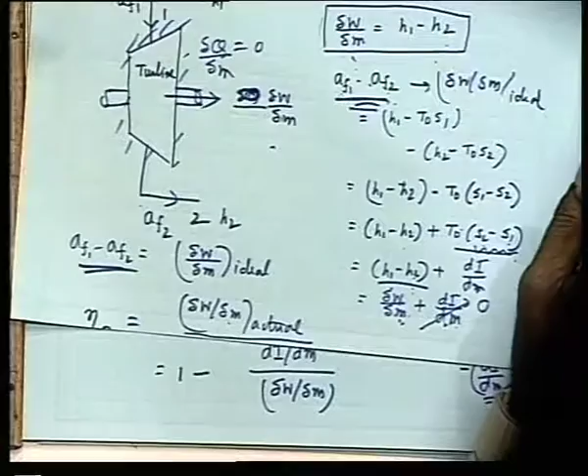Eta 2, theoretically, can it be made equal to 1? Very good and very, very intelligent question. Now I must tell you, it's a very good question that theoretically second law efficiency can be 1, while theoretically heat engine efficiency, Carnot's efficiency, can never be equal to 1. Even in a reversible process, you cannot have 100% Carnot's efficiency. Very good question. Whereas second law efficiency can be 1.

This is because the reversible process does not defy the laws of physics. A frictionless system, a massless particle, an elastic system, an inviscid fluid - these are all consistent with the laws of physics, but cannot be conceived in practice. So therefore, all these systems constitute an ideal process or ideal systems. Things are reversible there, so irreversibility is 0, and we can achieve a theoretical second law efficiency of 1.

But even if all these things are ideal - a machine without friction, an inviscid system, everything free of dissipative effects - you still cannot have 100% Carnot's efficiency theoretically. This is a very, very important and vital question. I will ask this question whenever I meet you in any stage of your viva, including the final grand viva, because my students must answer this. What is the difference? Second law efficiency can become unity, just like the efficiency of a transmission system, or efficiency of a generator or motor. But Carnot's engine cannot have 100% efficiency even in the theoretical case. So, very good question related to these consequences. Okay, thank you.